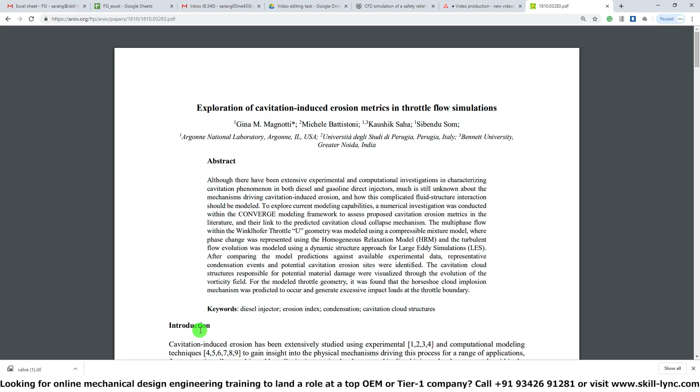The primary reason for this particular group to work on this study is to look at the effect of cavitation on fuel injectors. The idea is very simple, and most of you might know what cavitation is. Here, for example, you can see that there is a nozzle and there is an abrupt change in flow radius. Here the flow diameter is this big and suddenly the flow diameter is reduced by having a throat. This causes a huge low pressure region or an area of separation, correct?

And when pressure becomes low, and if it becomes lower than the vapor pressure of the fluid, then the fluid instantaneously vaporizes into gas phase. This affects the injector properties in terms of delivering the required fuel flow rate, and this can subsequently affect the combustion performance and also the emission performance. That is why in automotive applications looking at cavitation is very important.

Now if you take applications in the HVAC world or the turbomachinery world, cavitation is extremely important in rotating devices. For example, in centrifugal pumps, due to the high impeller speed, the pressure can go really low on the back side of the impeller tip, where low pressure zones can be created, and it is at these zones where the fluid being pumped can vaporize into gas phase and form gas bubbles which can hit the structure and cause erosion and eventually failure of that particular component.

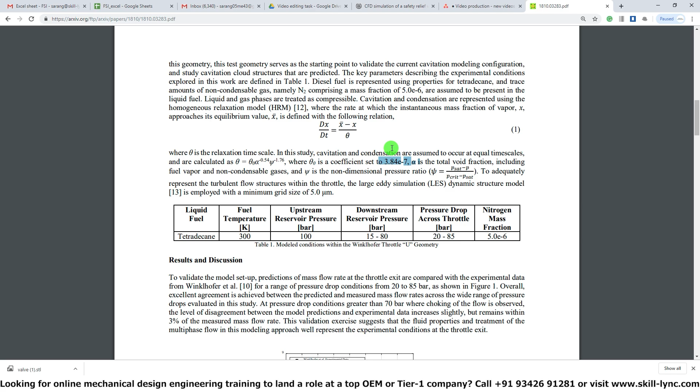Now in Converge CFD, the transition from liquid phase to gas phase is described by this particular rate law. dx/dt tells you the rate at which the liquid is going to get converted to vapor, and you can see that it happens based upon a time scale called theta. Theta is calculated based upon an empirical model, a model created from experiments, where you have some key constants which help you get the correct vaporization rate. These are the set of constants that we will be using for our Converge case setup.

Now I will be directly going over the case setup. This case setup will be shared with you, so you don't have to worry about setting it up from scratch. I will be going over it from top to bottom so that you understand every step. First of all, if you look at the model, you can see that it's really small. When you enable the bounding box, you can see that the largest dimension is just 2 millimeters. That's because we are looking at a nozzle and the nozzle size is extremely small.

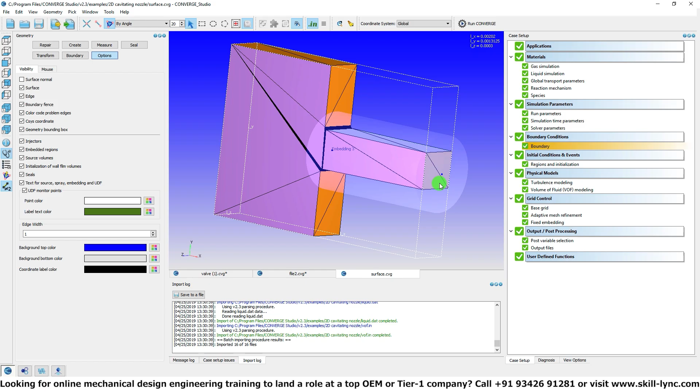So the size of this nozzle is comparable with most diesel injectors out there. So if you look at the material properties, we are performing a gas and a liquid simulation together. So that suggests that this is a multi-phase flow simulation. Alright, so now let's look at liquid simulation.

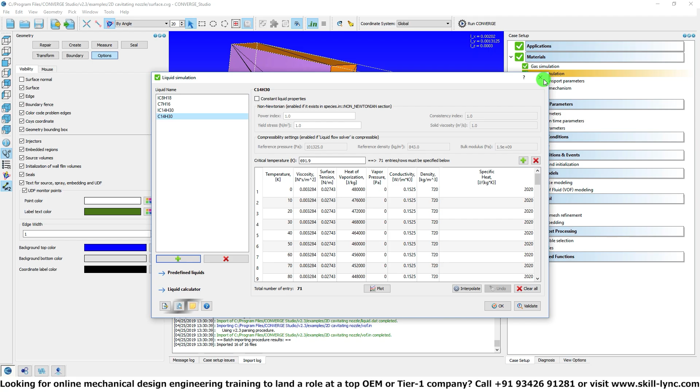So here you can see that several liquid properties are being used, but the one that we really care about is C14H30, and that is what we are going to be using, which is nothing but tetradecane. And if you click on species, you can see that there's something called liquid, and this is where we are telling that out of all those liquid properties that we had selected, IC14H30 is what we are going to be using. As far as the gas species, you can click on reaction mechanism to learn which are the gas species that are being used. Here we are using gas phase tetradecane and N2, which is nitrogen.

So the reason why we are picking up gas phase tetradecane and liquid phase tetradecane is to basically enable the cavitation model, right? Initially you have liquid tetradecane in your domain, and when cavitation takes place, this liquid is going to get converted to vapor, and when it converts to vapor phase, it's going to be called C14H30, but it is in the gas phase. And in order for you to run the simulation in Converge, you have to explicitly say which is your liquid phase and which is your gas phase.

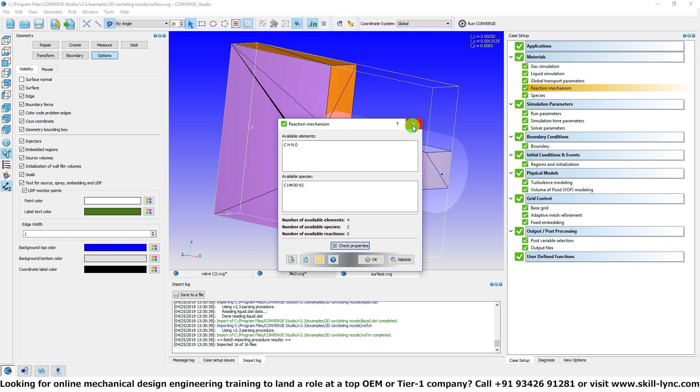So that is done. If you look at the run parameters, it is a transient simulation. And if you look at simulation time parameters, you're running it for only 2 milliseconds, right? That's typically how long an injection duration is. But if you look at the time step, look at this. We are being extremely conservative. Our minimum time step is 1e-10 and max time step is 0.01.

The main difference here, however, is in your CFL number. Typically, for the simulations that we have done so far, our CFL number has been 1.0, but here we are limiting it to 0.5. That means your velocity information cannot propagate more than one computational cell. In fact, it can propagate at a max only half of a single computational cell. That's basically what the CFL number is.

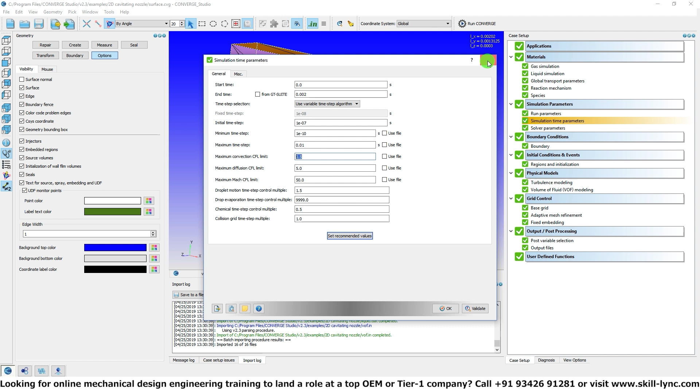And if you look at the other CFL numbers, that has not been changed a lot. And when you run the simulation, you will see that your convection based CFL is going to limit the problem. How am I guessing that? Well, I will be able to explain that when you look at the boundary conditions. Solver parameters, we don't change it. We use the default values.

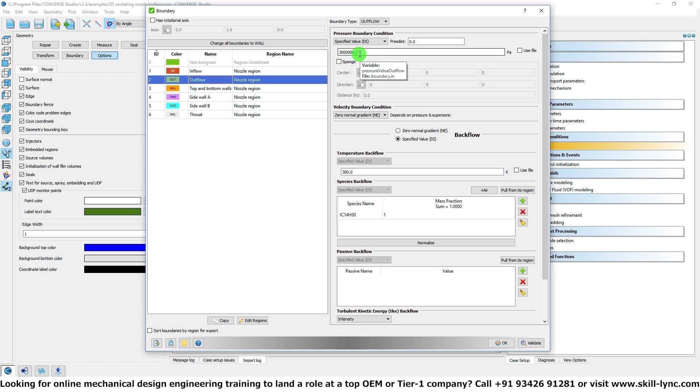If you go to boundary, the primary difference comes at the inflow and outflow. If you look at the inflow boundary, we have IC14H30, which is the liquid tetradecane, but look at the pressure value, right? So this is a huge value of pressure, and if you're reading it correctly, it's 100 bar. So it's 100 followed by 5 zeros, right? So that's 100 bar. And if you look at the outflow boundary, it's 30 bar, right? So there is a difference of 70 bar. That's a huge pressure difference, and that's going to drive the velocity very high. And that is why we are concerned about the velocity based CFL number, also called the convection based CFL number. Hope that makes sense.

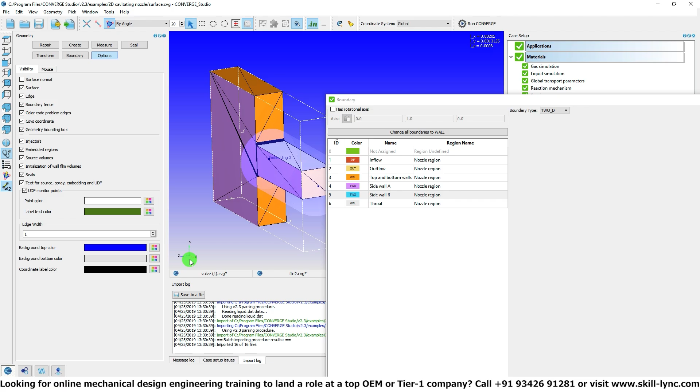The top and bottom walls, which are the orange boundaries, are going to be wall boundaries, so you don't worry about them. If you look at side wall A and side wall B, they are type 2D. That suggests that this is a 2D simulation, and you can see from the shape of the geometry that this is clearly two-dimensional. That is, flow along X and Y are the only ones that matter. Along the Z axis, the flow does not change.

Then finally, at the throat boundary, we are creating a separate boundary for the throat, and then we are assigning it the wall boundary condition. Now, you can see that there is a cylinder type structure here. What is that? Well, we'll look at that shortly.

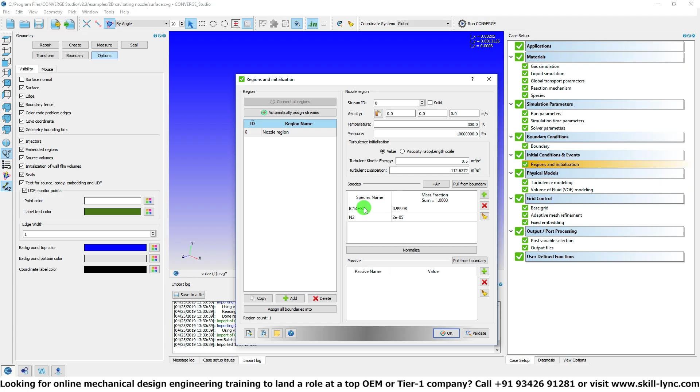Next comes regions and initialization. Now here what we are basically doing is we are creating a nozzle region and we are initializing that with 100 bar pressure, right? And you can see that I'm filling that with tetradecane and also a very small percentage of N2. This is basically done to help convergence. Even if you don't have it, it's fine. You can just have pure liquid tetradecane occupy this entire space. That's fine. But having a little bit of gas phase helps out with convergence. So let's click on OK here.

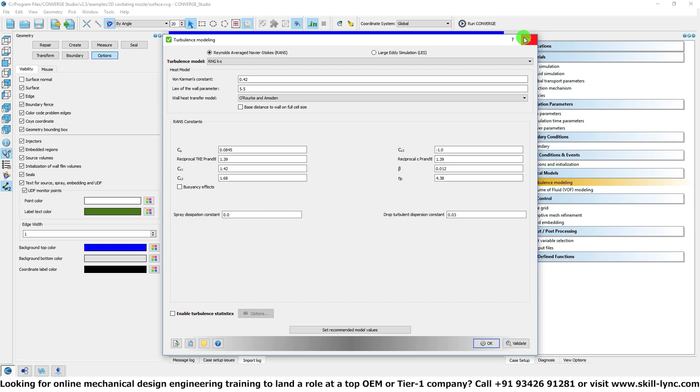For turbulence modeling, you will see that we are just using RNG k-epsilon. Again, in this particular case, we are interested in cavitation, which is going to be an effect of pressure, and it's not going to be an effect of shear, right? So for that, the turbulence model should not be a huge issue, so we are not going to change it.

The most important piece here is the volume of fluid method. You can see that there are a couple of techniques. Here we are just using basic VOF. The idea is we are going to be solving one transport equation for the liquid phase and one transport equation for the gas phase, and automatically the interface between the liquid and the gas is going to get calculated.

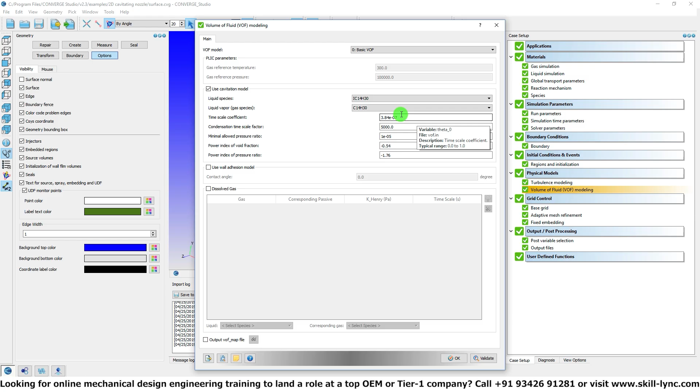We are going to be using the cavitation model. Here the liquid species is selected, gas species is selected, and you can see that it's a list that you get automatically, so make sure that you select it correctly. And then you basically set up your time scale coefficient, which we got from the paper. All of this is done, and let's click on OK.

So then when it comes to base grid, you can see that the initial base grid is very small. It's 4e-5. Okay, and then on top of that you have adaptive mesh refinement. Now notice that we have adaptive mesh refinement based on two parameters, velocity and species, right? So we are doing it based on species. It's a permanent type AMR, and the AMR SGS is 0.0001. This particular value does not have a unit.

So here what we are basically saying is when vaporization takes place or when cavitation takes place, you will have gas phase species and liquid phase species, correct? So we are just going to be tracking the curvature of the gas phase species in our entire domain. Wherever the value of the curvature exceeds 1e-4, we are going to be refining the mesh. Okay, and the maximum embed level is 3. So this is one set of refinement.

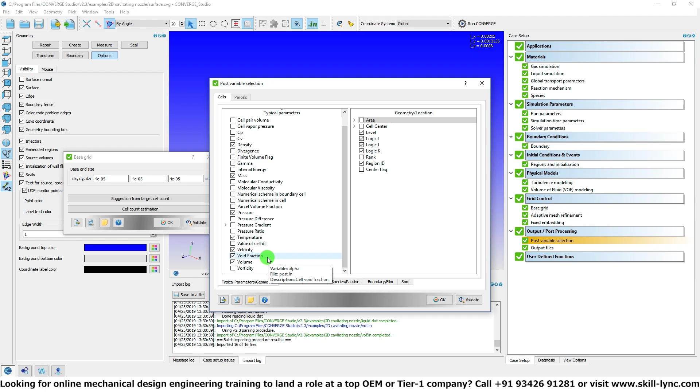The other set of refinement is purely based on velocity, which is completely on right from the start, and the SGS criterion, or the subgrid scale criterion, for that is 0.1 meter per second. So that's basically it. And when it comes to post variable selections, we are using pretty much all the values. In addition to the usual values, we are selecting void fraction. That helps us identify our gas phase and liquid phase correctly.

Finally, when you look at output files, here you can see that the text output is written every time step. 3D output is written every 5e-5. So I think that's basically every couple of time steps you are writing an output file. The reason why we are doing that is to basically understand how the cavitation bubble starts to form.

Alright, so with that, I would like to conclude this video. We are going to be running the simulation, and once we have the results, we will come back and we'll discuss that in another video.